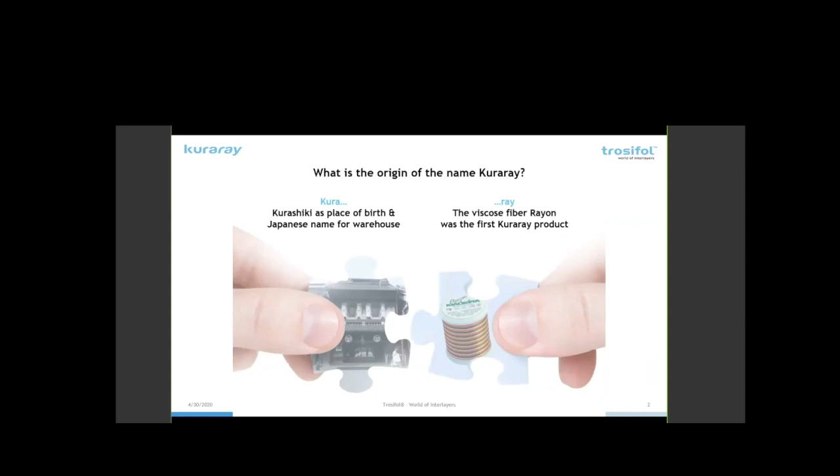So before we get into the part about the glass and the interlayers, let's talk about Kuraray itself, because a lot of people are not familiar with the company Kuraray. The company was founded in 1926 in Japan, and the origin of the name, the first four letters, the Kura, comes from Kurashiki, which is the area in Japan where the company was founded. The last three letters, Ray, that's for rayon, which came from the first product that Kuraray manufactured. So you put them together, you get Kuraray.

So Trosifol is the Kuraray interlayer business, and you can see how it evolved over time. Kuraray in 2004 bought the HT Troplast business, and that started their venture into interlayers, and that was their PVB business, and that's where the Trosifol name comes from. In 2014, so next month it's going to be 6 years, Kuraray purchased the DuPont GLS and vinyls business.

And along with that came products such as Butacite PVB, as well as SentryGlas and SentryGlas Expressions, and the whole portfolio of the interlayers from DuPont. So now the whole thing is combined, and it's all under our Trosifol brand of products. The brand names are still the same. I have crossed out the Butacite because our PVB portfolio is now all called Trosifol.

So there are several applications that we'll be talking about today where laminated glass is used. First of all, we'll talk about some overhead applications such as canopies and skylights. You need laminated glass to reduce the risk of falling glass as well as fall through. Guardrails. Guardrails is a big topic these days as the codes have changed, and we'll spend a little bit of time on what's going on with the codes and standards for guardrails.

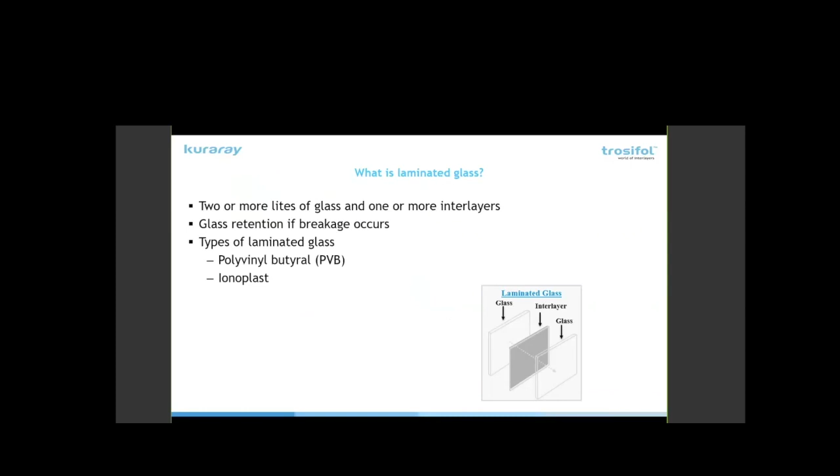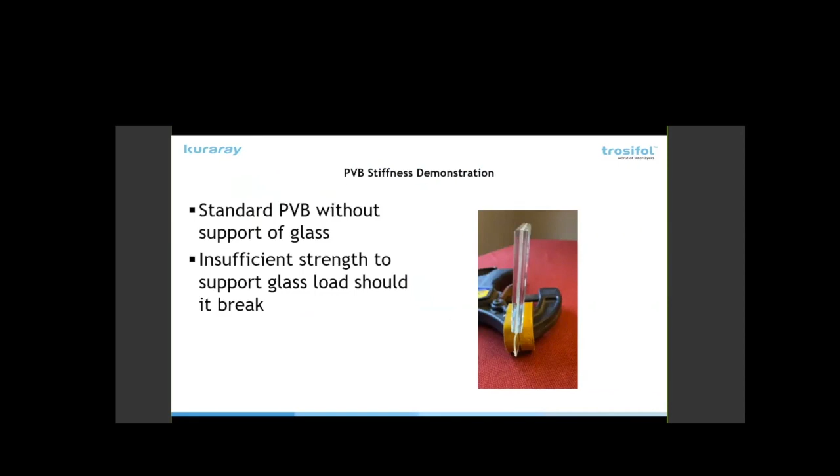Now, if I were doing this in person, I'd have samples that I could hand around and you can feel what the interlayer is actually like. You can see on the picture there, the interlayer is exposed on about the bottom inch of the sample. The rest is laminated with glass. So with PVB, it's a soft interlayer originally developed for the automotive industry in the 1930s. You can see if it's not supported by glass, the interlayer itself cannot support the structure. So it's not really a structural type interlayer.

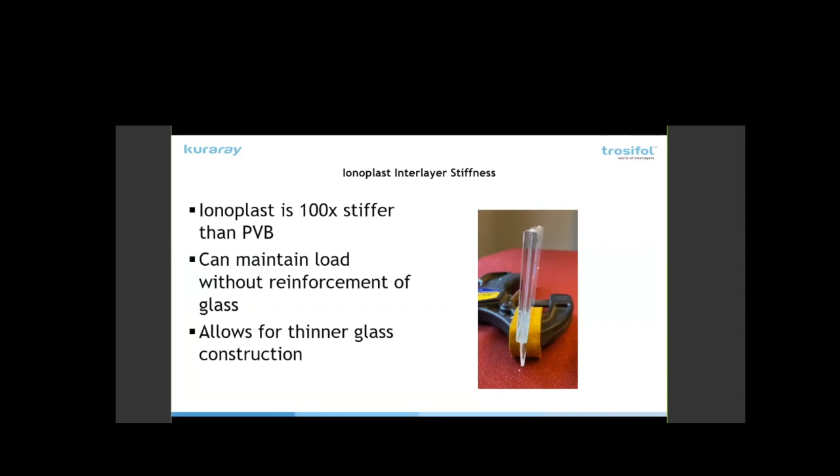Now with ionoplast, it was invented in the 1990s after Hurricane Andrew struck Florida, and it was developed initially for improved hurricane resistance and windblown debris resistance. So it's 100 times stiffer than PVB. It's got 5 times the tear strength, and it can maintain the load even without the reinforcements of the glass. So this may allow for thinner glass construction. That may be important if you're doing larger glass, because as you go larger and larger, it gets heavier, and if you can reduce the thickness, that can help offset some of the weight.

So this is what it looks like with a SentryGlas interlayer. And you can see it stays up by itself. You can deflect it. It just returns to the same place. And you'll see more videos of actual glass breakage as we go along through the presentation. But that's just a little bit of background as far as getting some understanding of the differences between the interlayers.

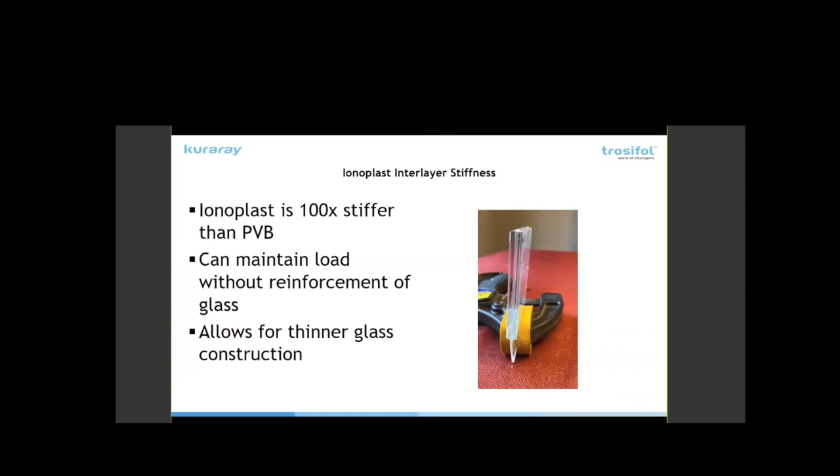As far as the codes, where you're going to find a lot of information, if you go to IBC Chapter 24, you'll find the overhead glazing types information there. You'll find information on handrails and guards. It'll talk about safety glazing for shower enclosures and other hazardous locations. There's information about floors and elevators and so on.

One thing I do point out is that tempered glass is considered safety glazing. And in some applications, such as shower doors, you can use tempered glass. Other applications, like in overhead applications and in most handrail applications now, you have to use laminated glass. So both laminated and tempered are safety glazing. Heat strengthened glass is not, and annealed glass is not safety glazing. It has to be a laminated heat strengthened or laminated annealed to meet those requirements.

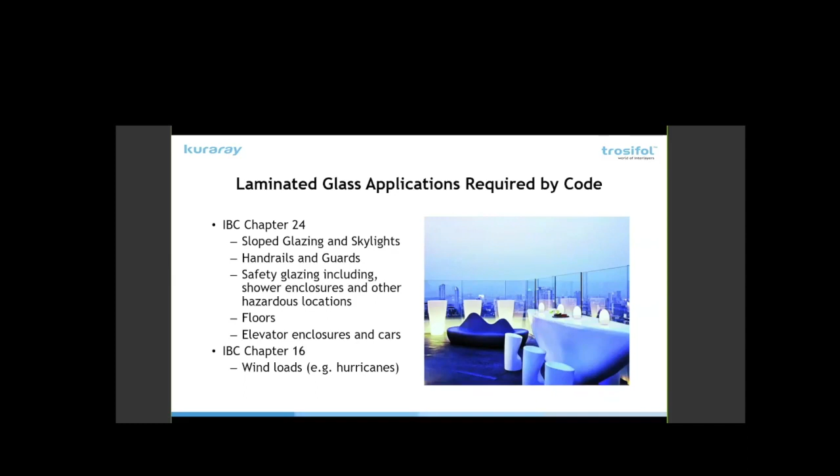As far as overhead is concerned, the codes call for a minimum 30 mil PVB interlayer. And the key word there is minimum, because in a lot of cases when it's engineered, it won't meet the requirements. So in these two pictures here, you see large point-supported glass. That's in Phoenix. So with the heat, you may get some sagging, and you'd have to go thicker with the glass if you didn't have a stiff SentryGlas type interlayer.

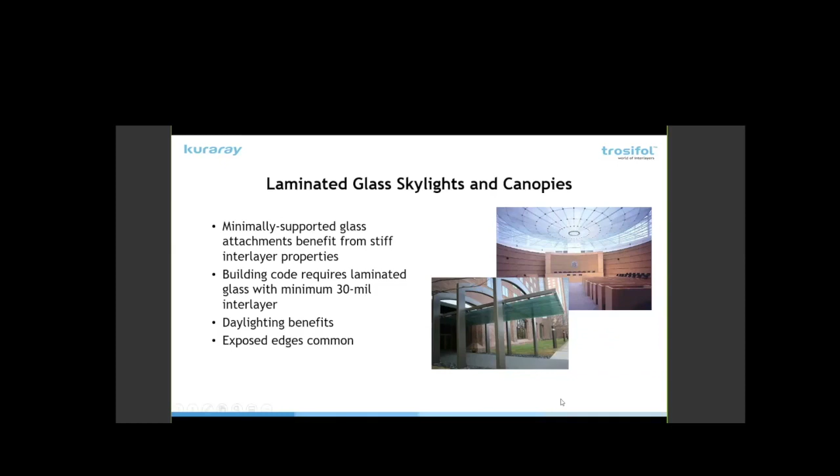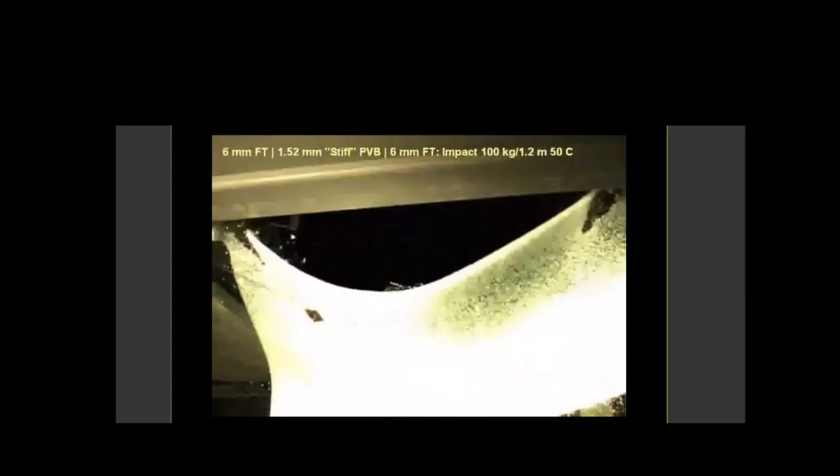This is a good example where you have exposed edges and point support, and you'll see in the next chart and video what happens when you have that type of situation. What you'll see here is a stiff PVB. It's our Trosifol ES and our SentryGlas, each being impacted with a falling object. It's 100 kilos or 220 pounds dropping from 4 feet. And this is your stiff PVB, and you can see how it tears from the point supports. And obviously that is not a safe situation.

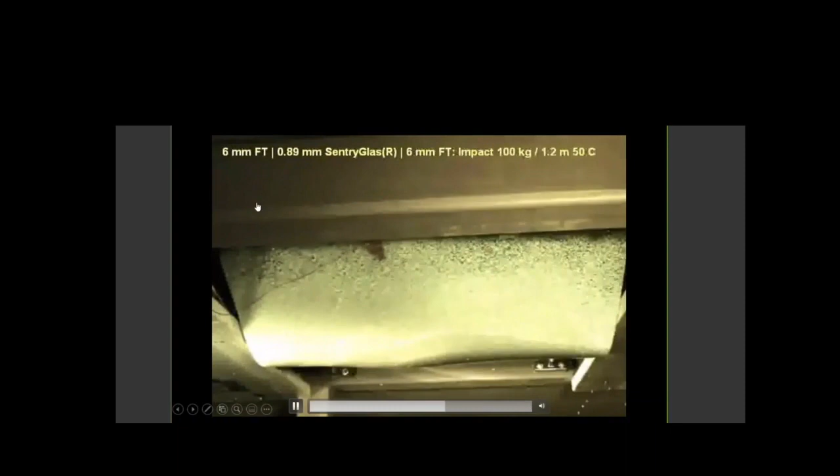Now with the ionoplast, same type of test, and this is a thin ionoplast. It's only 35 mil, 0.89 millimeter, and it does not tear, it stays up. So let's say if a worker were on a canopy doing something and he tripped and fell, there is safety built into that type of system.

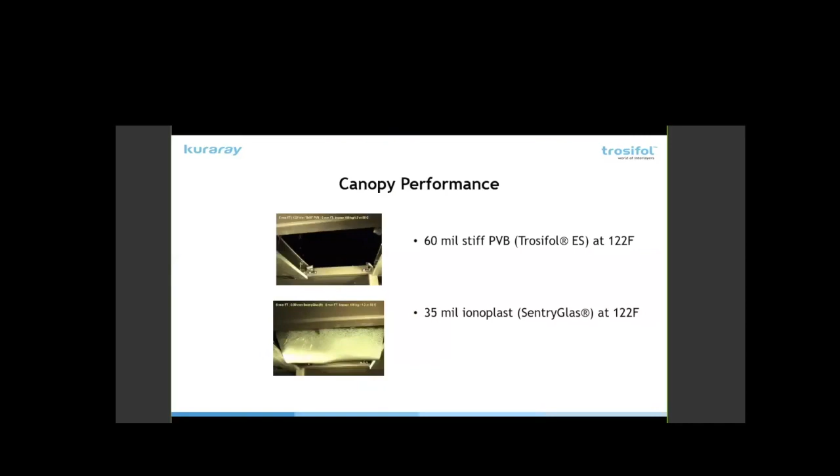Railings and guards: I mentioned earlier that there's been a lot of change in the standards over the past half dozen years or so with railings and guards. In IBC Chapter 24, it says glass used in handrail, guardrail, or guard section shall be laminated glass constructed of fully tempered or heat-strengthened glass. It used to be either laminated, fully tempered, or heat-strengthened, or you could use fully tempered glass.

There's an exception to that where you can use tempered glass if there's no walking surface below or if the walking surface is permanently protected. So if there's a canopy around the building, you may be able to use tempered glass because if the glass falls, it protects the people below. Personally, I don't like that exception because if the glass falls and you're the unfortunate person on the 20th floor, there's nothing protecting you from falling over. So I personally am not crazy about that exception.

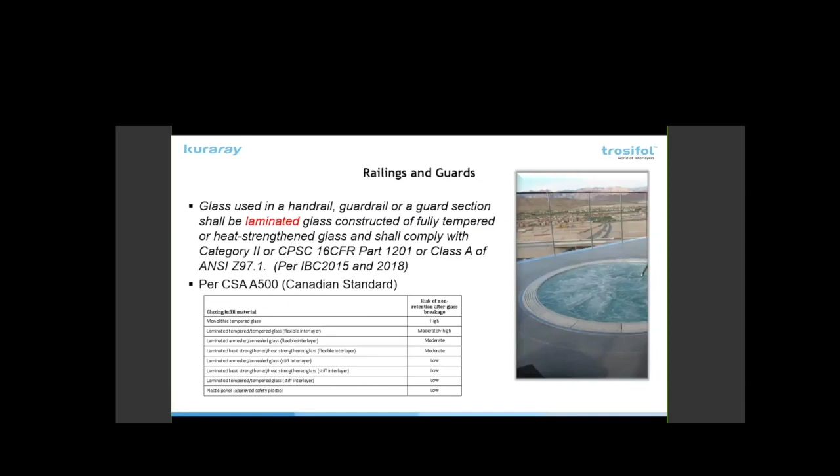Now, in the Canadian standard, CSA A500, which came out in 2016, they have a table in there that talks about the risk of non-retention after glass breakage. And you can see with tempered glass, it's a high risk. When you get a flexible interlayer like a standard PVB, you can see it only goes to a moderately high or moderate risk, and you'll see why in a minute. When you get a stiff interlayer, and the standard defines a stiff interlayer as something with a Young's modulus of over 300 megapascals, so a SentryGlas would fit into that category, it becomes low risk.

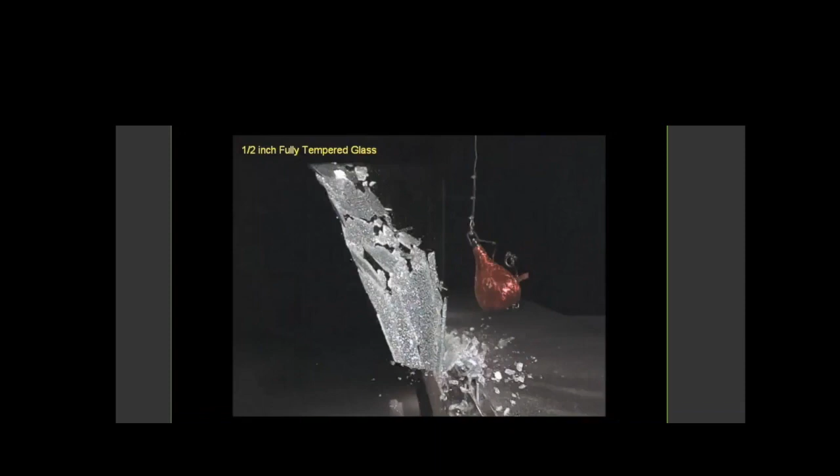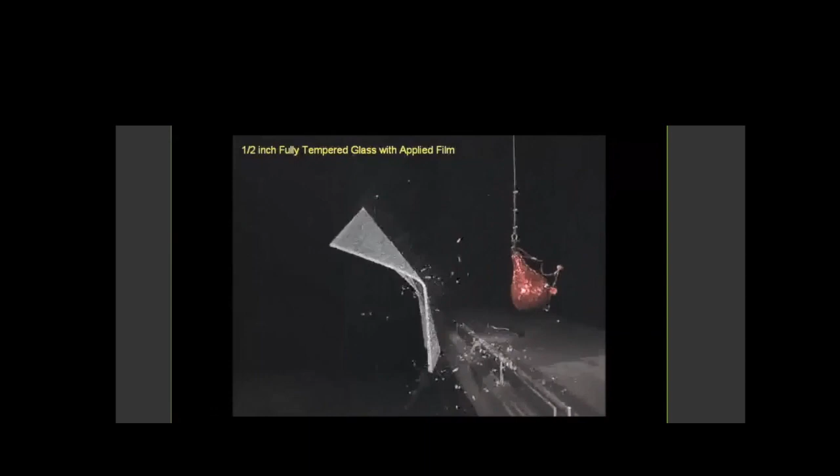So what does it look like? This is your half-inch tempered glass after impact. You see how it breaks. I think most of you are probably familiar with that. It's supposed to break into small pieces, and it does. But if you look at some of these big chunks that are agglomerated before it hits something else, if a half-inch piece of glass that size hit you on the head, it would not be pleasant. If you put film on it, it holds the glass together very well, but now you have one piece of glass falling. It's very dangerous.

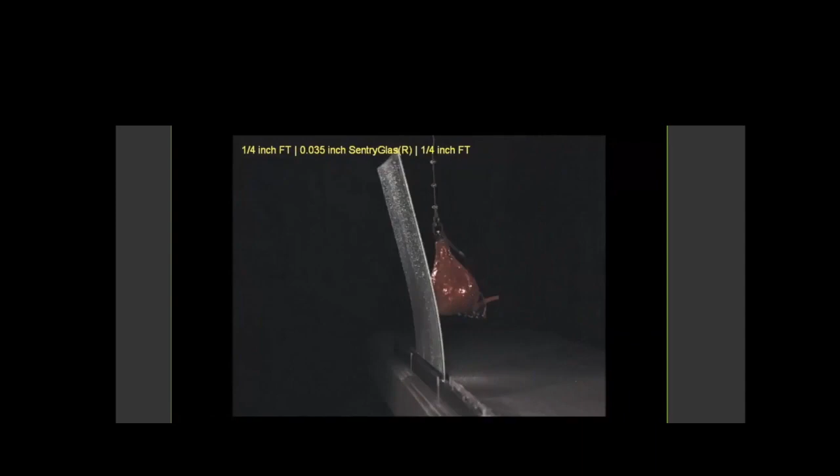PVB, this is very similar to what you saw earlier. Once the glass is broken, there's nothing there to reinforce the PVB and allow it to stand up. It falls over like a wet blanket. And now with the SentryGlas, and this is a thin SentryGlas, only 0.035 thick, it deflects and it stands up, and it provides protection not only for the people below, but it will provide protection for the people on the elevated surface.

Now another thing has occurred going from IBC. I hear some feedback. Let me make sure everyone's muted. Okay.

So going from IBC 2015 to 2018, the change occurred in how you could install a railing without a metal cap or without a railing connecting three pieces of glass. In IBC 2015, if you wanted to install a system like that, it required building official approval. In IBC 2018, it requires the system to be tested and the glass to remain in place, and it goes by ASTM E2353.

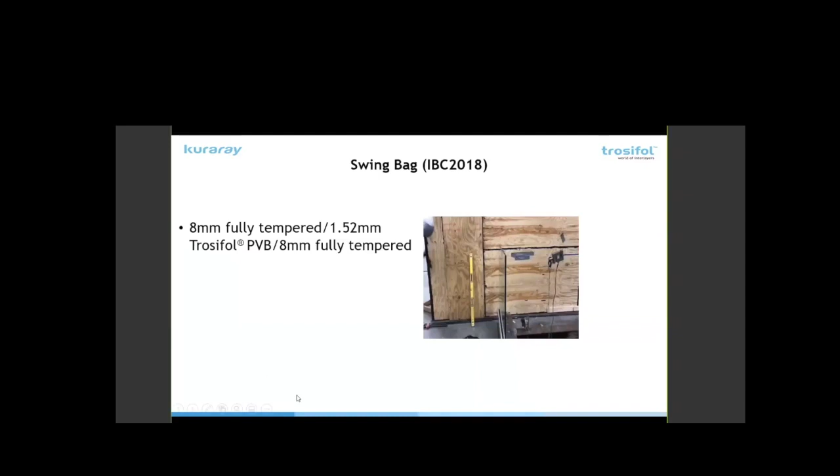So we've started doing some testing on the glass, and the previous videos were with 6 millimeter glass. This is 8 millimeter glass with the 60 thousandths Trosifol PVB, and after impact it does exactly the same thing that the thinner glass did. It falls over like a wet blanket. So then we've done it with SentryGlas, again with 8 millimeter glass.

It's impacted and it did not break. We were pretty impressed by this. Now, that being said, you can't go out and say, okay, I'm going to specify 8 millimeter glass and 60 mil SentryGlas interlayer, and I don't need building official approval. The railing supplier has to test the system, and the system has to pass.

The reason being, there's a lot of torque when you impact that glass, and let's say if the system isn't designed properly where it either can fall out of the shoe, or if, let's say, the anchors aren't long enough and the whole thing falls over, it all has to be tested. So someone like Jim Ellsworth may be a good resource to find out what the status of their system is for something like that.

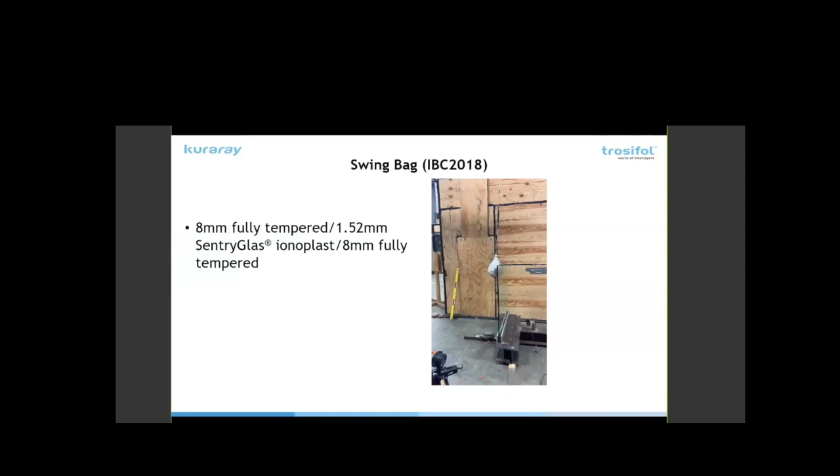A couple other things I like to point out when it comes to railings, because this comes up and architects bring this up, and I like to see glass get installed and everyone be happy with it. So ASTM C1172 is a standard for laminated glass, and in that standard there's a table that shows how much misalignment you can have for your glass, depending on thickness of glass and size. And in a typical railing type situation, you may have as much as 7/32 of an inch misalignment by the standard. Your clients will not be happy with that.

The other thing that you should be aware of when installing laminated glass into a shoe, and I'm going to mute all again.

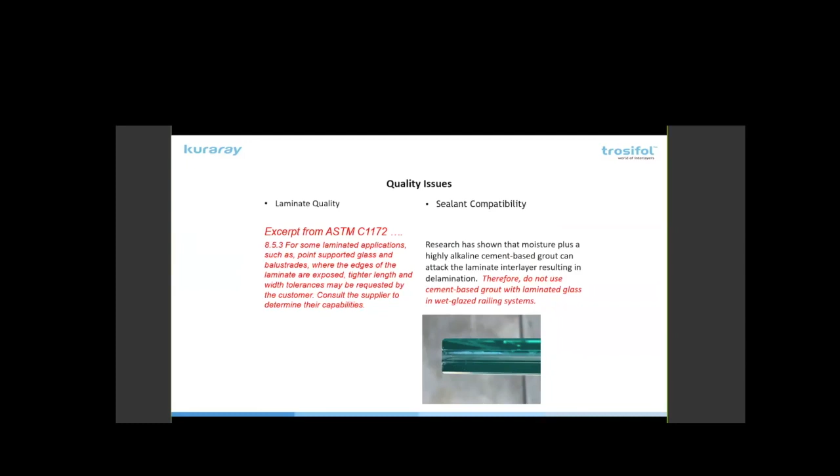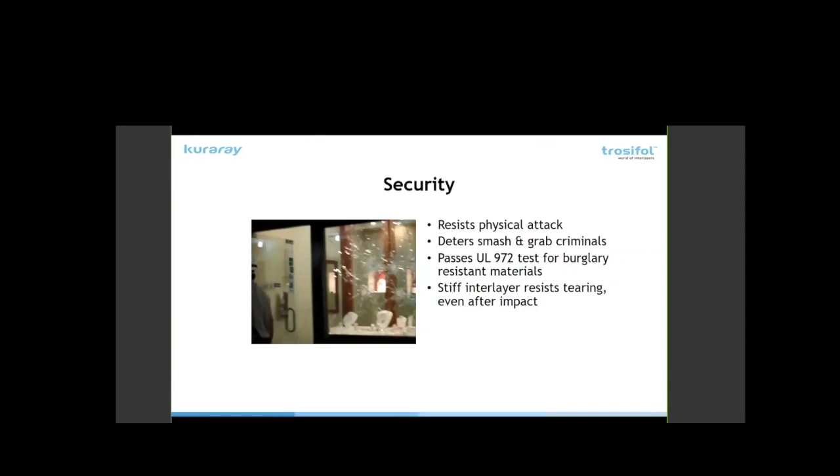So the baseball bat didn't work that well, so now he's going with a sledgehammer. And I was recently in on a presentation where the architect giving the presentation said the average time before a person trying to break in will give up is 14 seconds. So, you know, he spent a little more time and he was not through it. So glass can be designed for forced entry resistance.

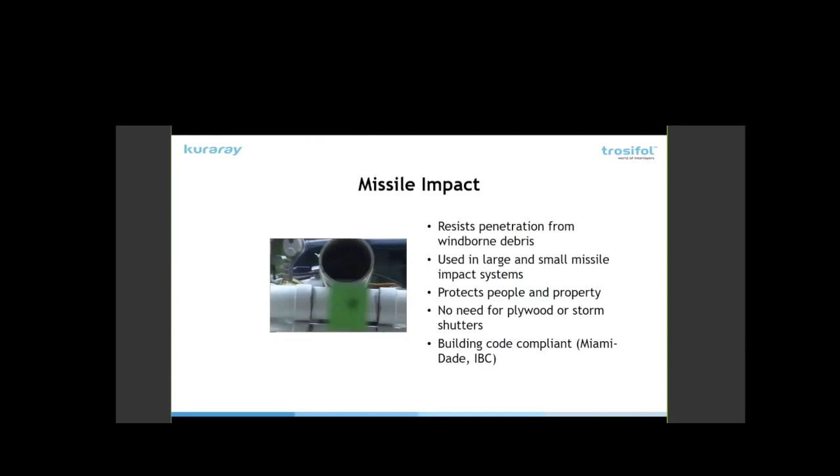Missile impact performance, this is important in areas with windborne debris. This is the reason SentryGlas was invented originally. So what you'll see here is a 9-pound 2x4 being shot at 50 feet per second or 34 miles per hour. The glass breaks, but it stays in place, and that's the objective. You want the glass to fill the opening. They'll pressure cycle this glass 9,000 times to make sure it stays there, because if the glass stays there, you avoid the damage on the inside of the building.

You may have to replace a piece of glass, but by not having to remediate all the damage from water getting into the building and wind getting into the building, you save a lot of money that way. You know, when you see a hurricane, everyone's out there putting up plywood and things like that. That's what you see on the news. But if you're building a high-rise or you have some sort of curtain wall system, you're not going to be boarding it up. So you need something built into it, and you've got to make sure that the systems have been tested and are compliant.

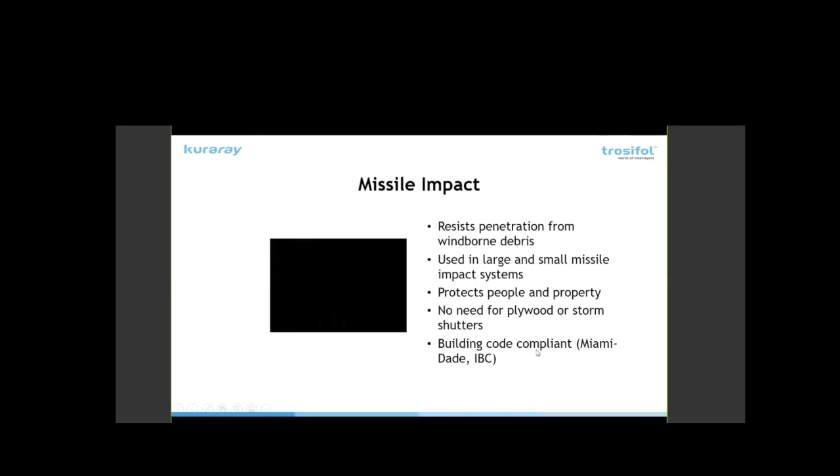One area that's coming up more and more in the past couple of years is acoustics and sound reduction, especially in areas with high population density. You know, there are standards in New York. Toronto just adopted some, I think, in October of last year. It's becoming more of an issue, and laminated glass helps reduce sound from one side to the other.

As a matter of fact, now we're going completely opposite of some of the things we've just seen. Instead of a structural type system, you're looking for something softer. And there are specially formulated PVBs available that are better than standard PVBs, and that will help improve your acoustics.

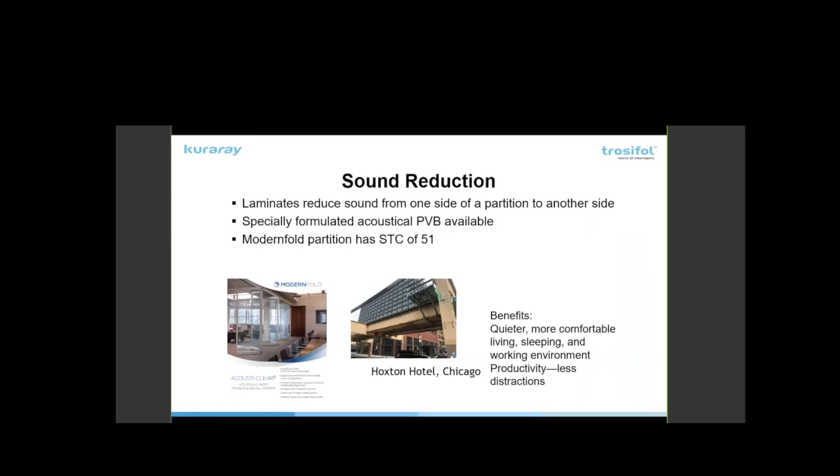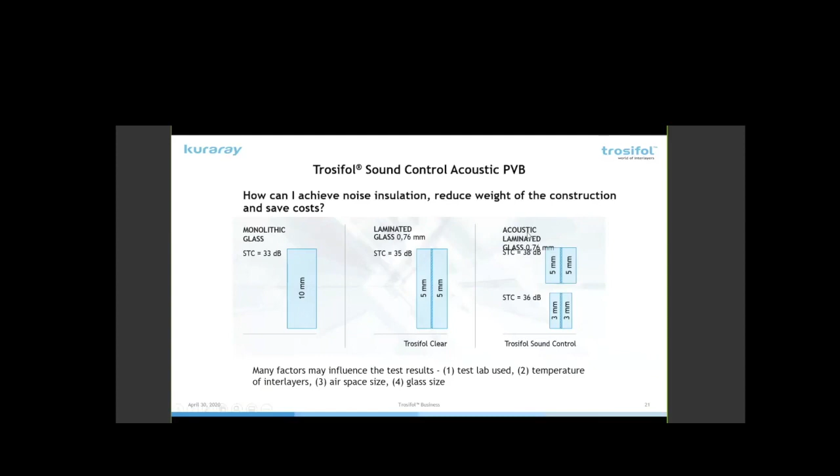So this is what your thought process may be when you're designing some acoustic glass. You can look at a monolithic piece of 10 millimeter glass and get an STC rating of about 33. Now, if you put in laminated glass with two 5 millimeter pieces of glass and a standard PVB, you could increase that performance to a 35. If you put in a laminated glass with an acoustic PVB and the 5 millimeter glass, you can go up to 38. So you go 5 points from a monolithic glass to an acoustic PVB.

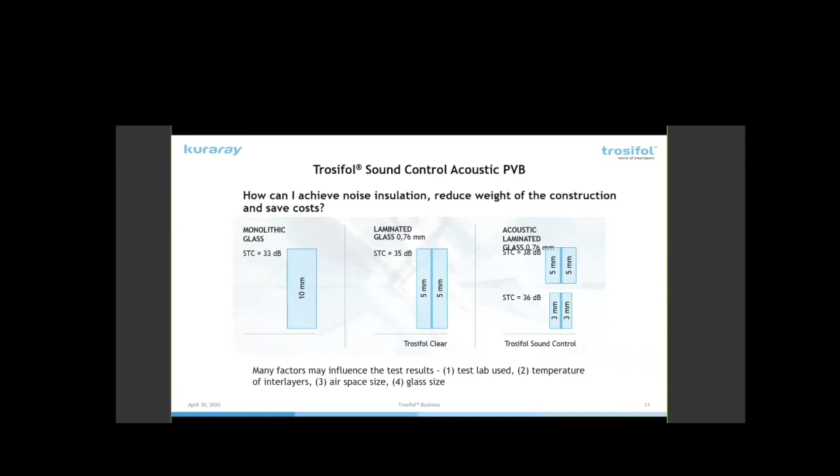Well, let's say you don't need all of that performance and you're getting a little bit thicker than you'd like to be. You can get better performance by going a little bit thinner on the glass, 3 millimeter glass with the acoustic PVB versus a standard PVB. So there's different options you can go through. If you have questions about that, we can consult with you on it. We have an app that you can put on your phone that will help you select types of glass construction to meet acoustic ratings.

So why does this happen? Basically, in glass, there's a coincidence dip. And the coincidence dip is determined by if you take the thickness of the glass and divide that into 12,500, you'll see where the coincidence dip is. So this is actually for 10 millimeter glass. You can see the coincidence dip is right around 1250 hertz. And you can see most of the area, it's pretty close, except here.

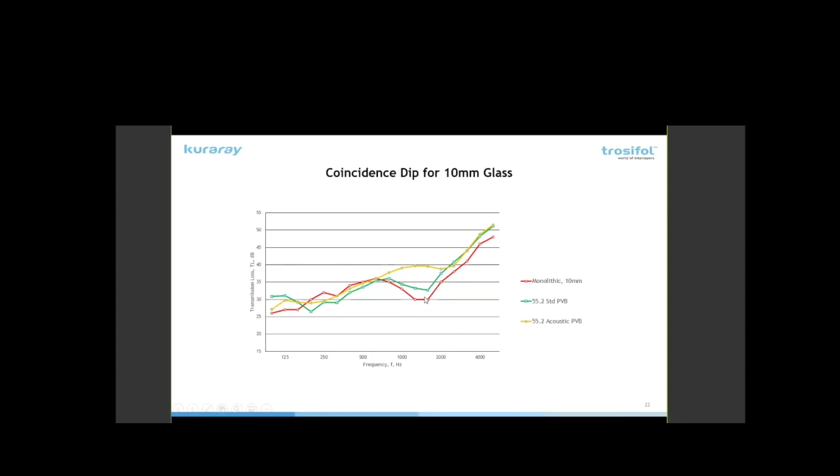So when we blow this up, in the area from around 1,000 to 2,000 hertz, there's quite a difference in acoustic performance. So while we were talking 3-point improvement versus a standard PVB and 5-point versus a monolithic glass, that's a weighted average. If you go to this particular frequency range, you're talking about 10 points from monolithic glass to an acoustic laminated glass. And 10 points, 10 dB is basically cutting half the sound by going to the laminated glass with the acoustic PVB.

So it's very significant in this range. And really the range of hearing that we're most sensitive to is in the 1,000 to about 5,000. So it's cutting out a big chunk of sound in the range that we're quite sensitive to.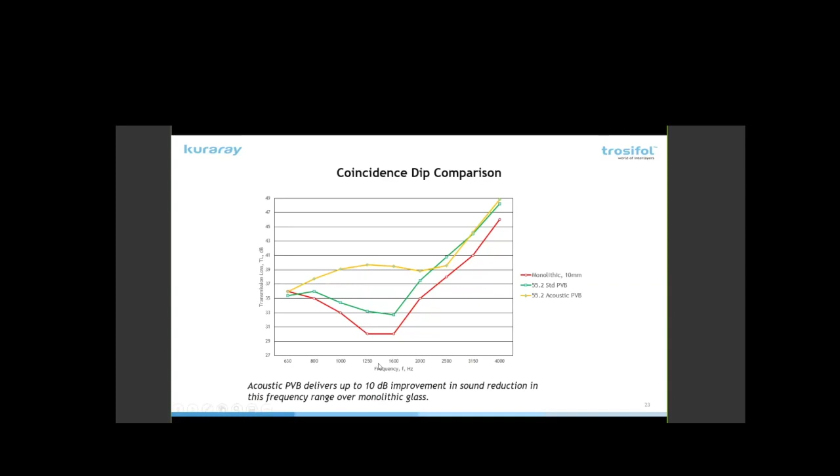So I showed you the picture of the Hoxton Hotel. You saw the outside. This is from the inside. I stayed there last year, and it's right on the L. And if anyone has ever been in Chicago and seen the L, it kind of sounds like this.

Oops, let me restart that. There we go.

Obviously, with the window open, you're going to get pretty much all the sound, but you close the window, and you've got a room where it's quite comfortable to sleep. There's still a little bit of low frequency sound that comes in. The low frequency sound, you can accomplish more reduction if you increase the mass of the glass, but it's very effective in reducing the sound and making for a quiet and comfortable environment.

Colors. Colors comes up quite often. Trosifol has many different colors. We have decorative colors and the standard architectural colors. An area that we have somewhat of a unique product offering is in our opaque colors. We have an opaque white and an opaque black.

The opaque white is outstanding if, let's say, you had a conference room and you wanted a writing surface but didn't want anyone to see any read-through from the other side. It's an excellent material for that.

It can be used in partitions or barn doors. In addition to the opaque white, we have 3 other opacities ranging from 80 down to 65% down to about 21%, depending on what the application is. I find that some barn doors, let's say like in hotel rooms, they're starting to use more laminated glass with some level of translucency separating the bathroom from the sleeping area. And I think the more opaque you can get with that, the better off you are, because if people sleep at different schedules, then you don't want to have a big light coming through from the bathroom.

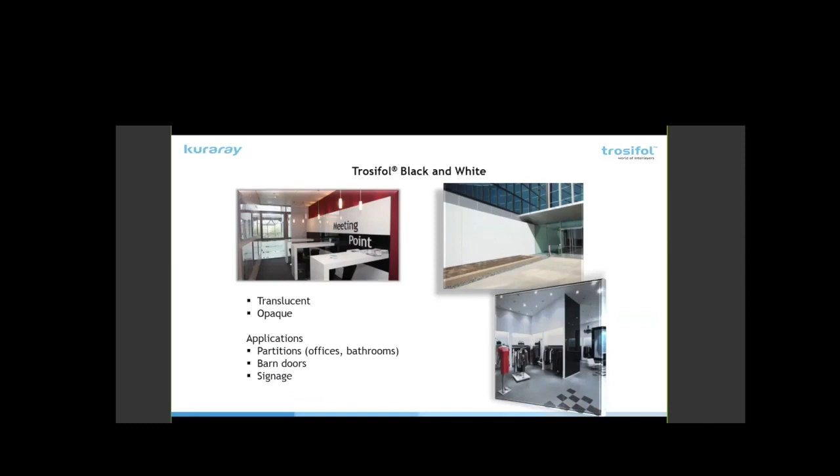Now, there is PVB that is ultra clear also. It's our Trosifol UltraClear product. It's almost as clear as SentryGlas. So if there are no structural requirements, if it's a pretty much standard storefront captured type application where you're using low iron glass, using a Trosifol UltraClear will maintain that appearance that you want to achieve with the low iron glass.

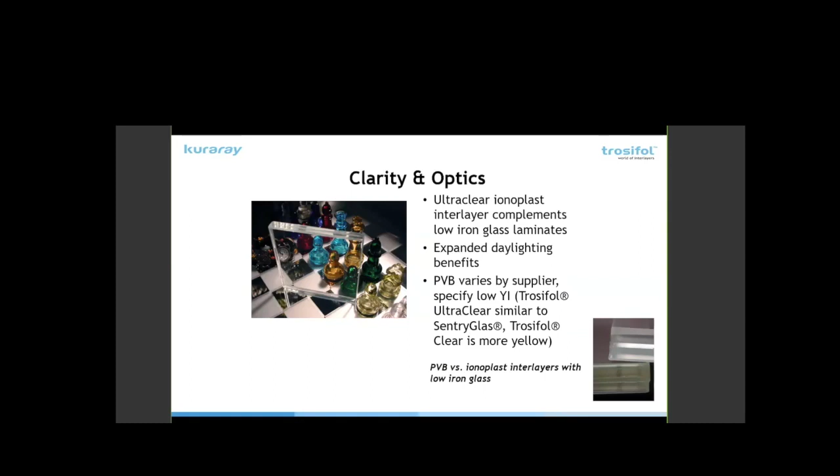Actually, we have a question. What do you recommend for interior arena conditions at cross-aisle concourse for helping to mitigate sound or echoes? Well, if sound is the biggest concern, the echoes are going to be tough because you still have glass. You've got glass surfaces, so that's going to be difficult to mitigate. But as far as sound transmission through the glass, the best would be getting like the Trosifol SC, the sound control interlayer, would have your highest STC rating, so you would reduce sound going through it.

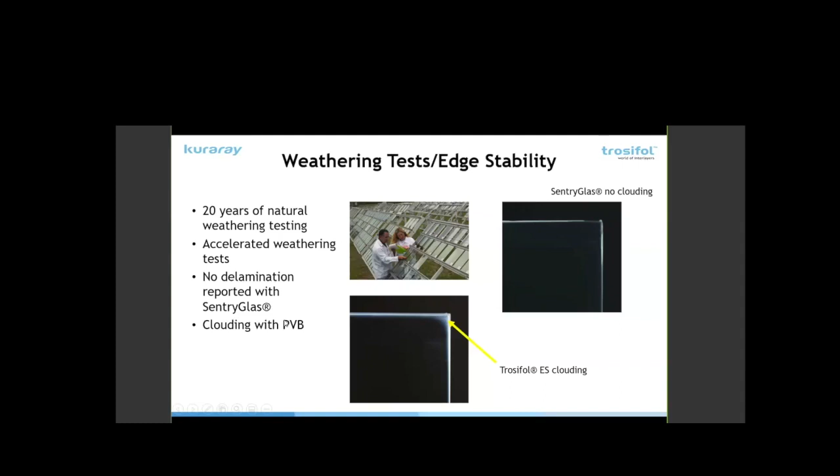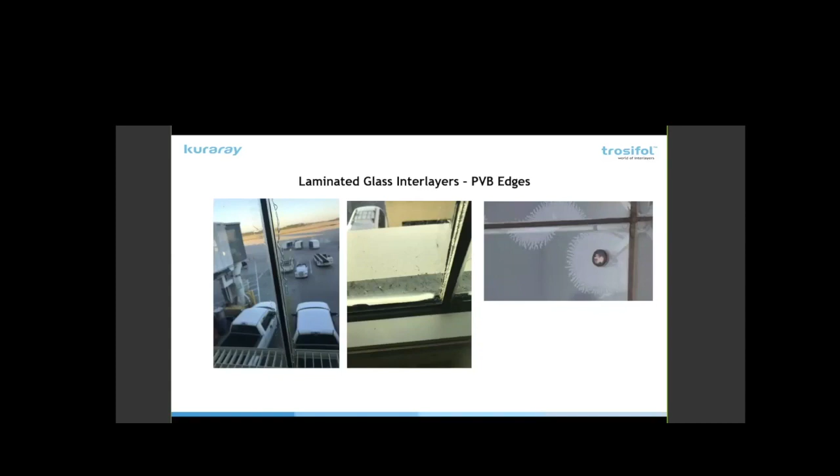We're global. We have technical support in all regions and sales support. And as I mentioned earlier, there are apps available for your phone. There's one on structural. You can do some glass calculations on your own. If you're trying to figure out what you want in your railing, you can get pretty darn close to it with the app. We have one for the sound control, and there's also one for light.

Got another comment here. What about exposed vinyl in an interior setting to reduce echo? That would be like a film on the glass. We really don't do that in our portfolio. I don't know if someone else would have something like that, but that's not something that we would offer. Typically, you wouldn't have a PVB exposed. It's just too soft. It would get damaged. It would get dirty, and you wouldn't be able to clean it very well.

There's some other products. We have a film that could be laminated on. It's a hard coat polyester, but I don't think that would have a big impact on the acoustics.

We've been through a lot of background about the interlayer, and we get back to where we started, and that's how do you select the appropriate interlayer for a given application. So it starts out, is it going to be outside or inside? From a Kuraray perspective, if it's outside and it's exposed edges, we're always going to recommend a SentryGlas or a SentryGlas Translucent White. It is available in translucent white, which is quite popular for things like canopies and partitions. I know Greco uses it quite a bit in partitions.